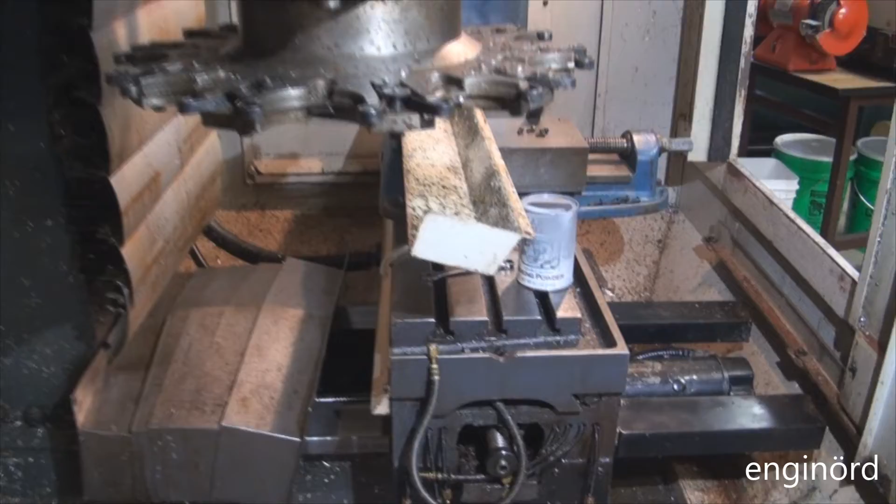Welcome back to the shrine and the dirtiest underbelly of my CNC. As you can see, some repairs are going on in this area. Some items are missing for the oil lubrication system.

For those who are not well versed in the realm of CNCs, most of them use flat beds, as you can see here. So this is basically the bed of the machine, and these are the rails, and this entire carriage that moves that y-axis back and forth slides on that ground and machine surface.

So there's the servo motor. The servo motor is driving a lead screw, and the lead screw is moving it back and forth. So this is the y-axis, and then this is the x-axis. You can see the x-axis motor only moves the table left and right, while the y-axis motor moves the x-axis, the saddle, and it's a lot more weight that the y-axis is moving.

So while I was doing some machining on the rapid moves, I got the Y lag over max error message, which means that the CNC wants to move this table in a rapid fashion, with a high speed for some travel, and it's commanding a certain amount of travel, but the feedback mechanism on the motor is not giving the proper feedback. So that means something is sticking, something is lagging behind.

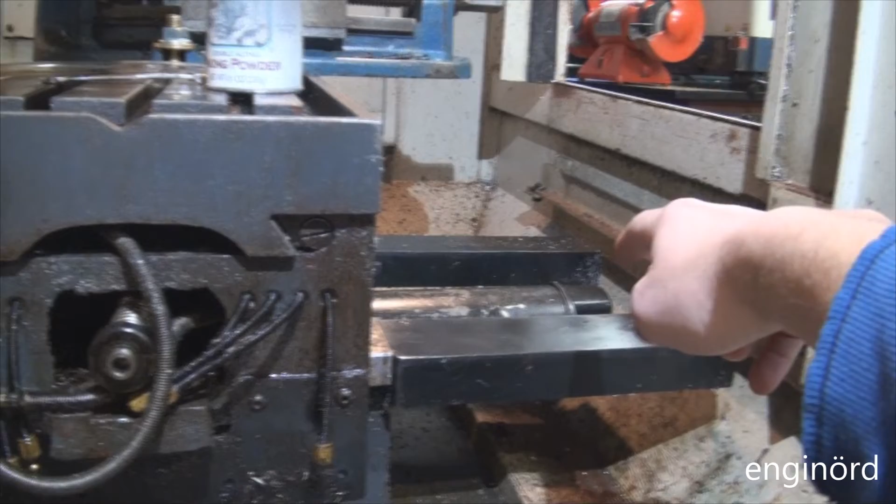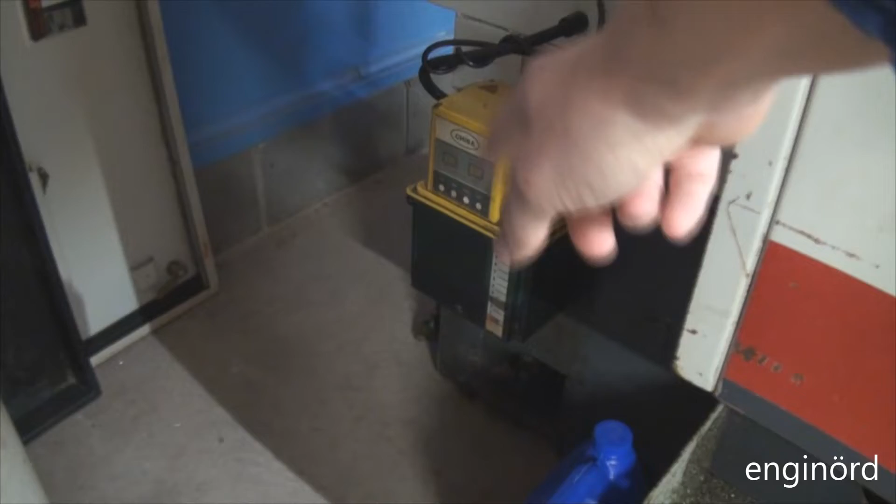So I took apart this motor to make sure everything is connected. That was the first thing I thought, and I checked if the encoder is properly secured, and that the coupling between the motor and the lead screw is properly tightened. And while I was doing so, I came around the machine, and there's the oiler, and the oiler was flashing an error 1 message. That basically told me that there's something wrong with the oiling system.

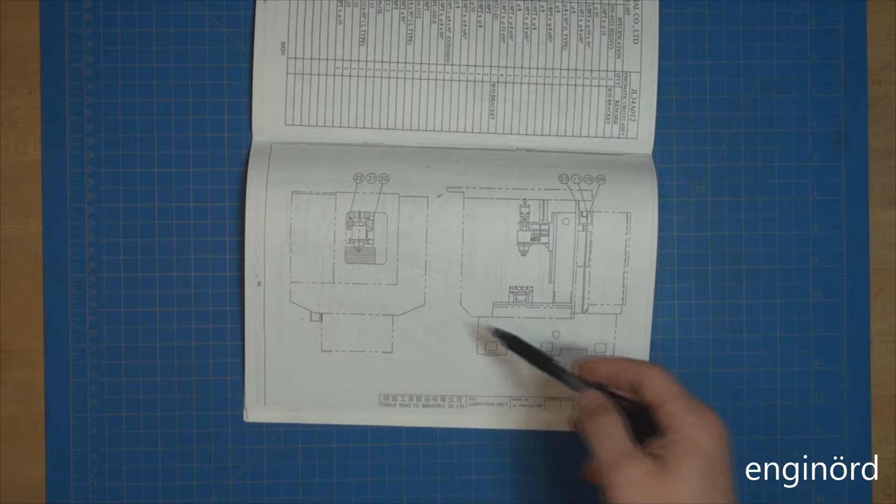So here's a picture from the instruction manual. This oiling system that's being used on the CNCs is called a centralized lubrication system. On some of the literature and online, it's being called single line resistance system, or SLR. What it refers to is there's a pump somewhere on the machine that feeds the oil into a central line, and then from that central line it's being distributed to all the places where lubrication is necessary.

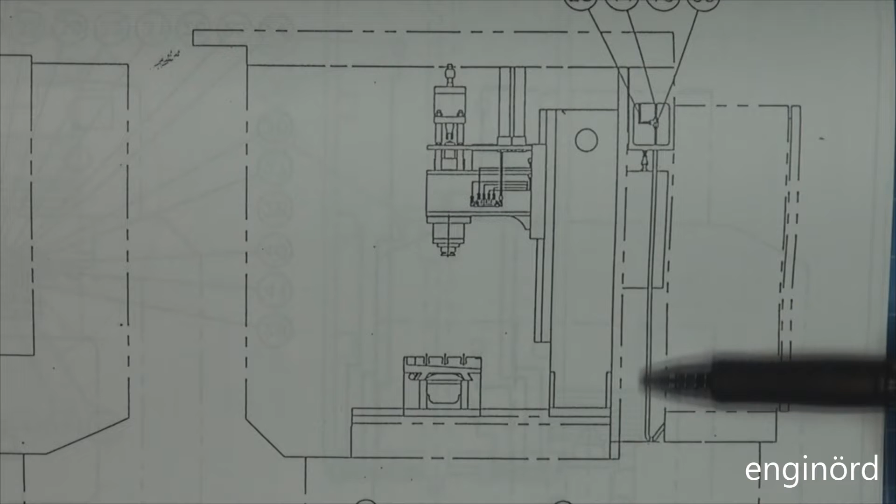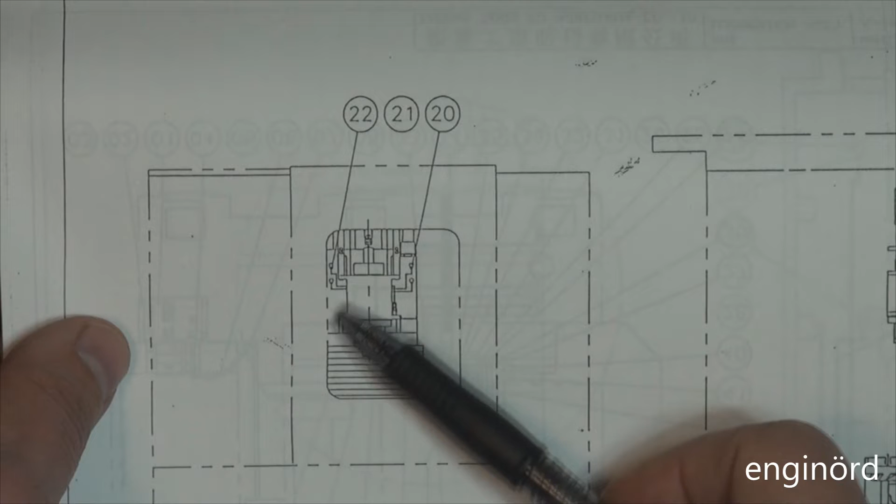So I'm gonna bring it closer, and what you can see here on the back of the machine, there's a line that's coming in from the pump, and then it splits into two. One side of the line will go to the Z gantry, and it's going to create lubrication here on the Z side. This picture shows where the lubrication is actually happening. You can see there are 4 ports that are lubricating the ways on the Z stage, and there's an additional one that lubricates the lead screw for the Z.

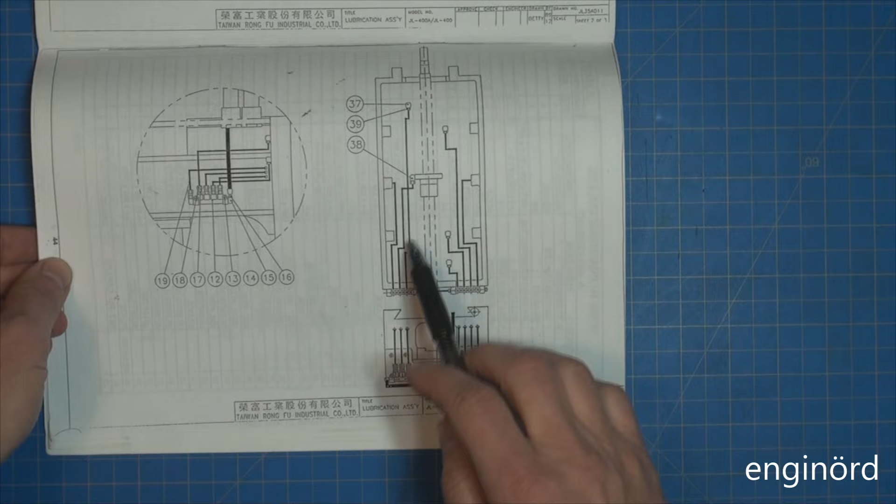So this one shows the lubrication for the saddle. Basically what we have here, one line is coming in, and it goes to a distribution box, and from the distribution box we have 3 going out, and then there's a connector here, and there's 4 going out here. So these are lubricating the Y or the saddle ways, and they are also lubricating the table ways. You can see there's also one line here that goes to the lead screw, so it's lubricating the lead screw.

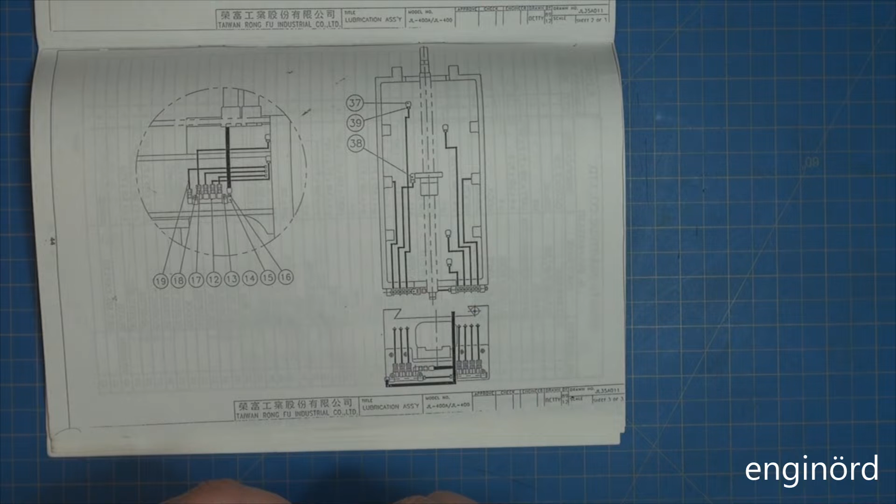I think these have never been serviced on the machine. If you go online and look at some of the instructions, they say that checking this system for a CNC, if it's running 24/7 all year, has to be basically an annual service where the lines are cleaned and some of these items inside are replaced.

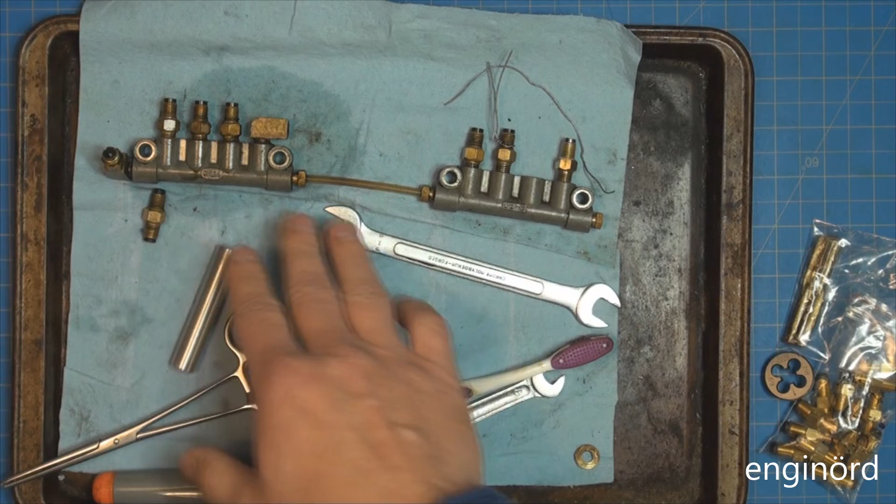So this is the distribution system that I removed from the y-axis, and right here you can see it's the same layout. Okay, let me try to frame it so you can see.

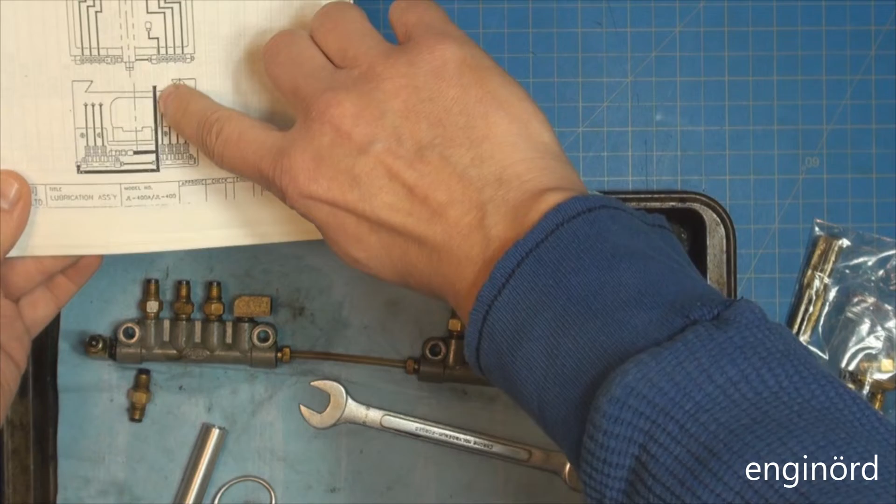So this is the bottom part that's missing on the machine that I showed initially. You can see a thick pipe is coming in here and feeding this port here, and that is distributing the flow. So these are the different outlets. Each outlet goes to a different place on the machine.

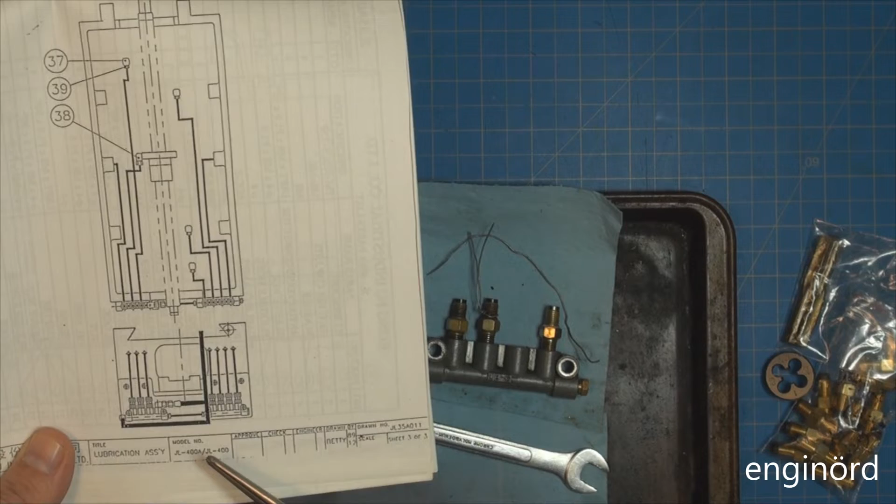So there are a total of 13 locations. There are 8 here that are being lubricated, and there are 5 on the Z, which you can see here. So this is the Z stage, that's the vertical axis, or basically the spindle.

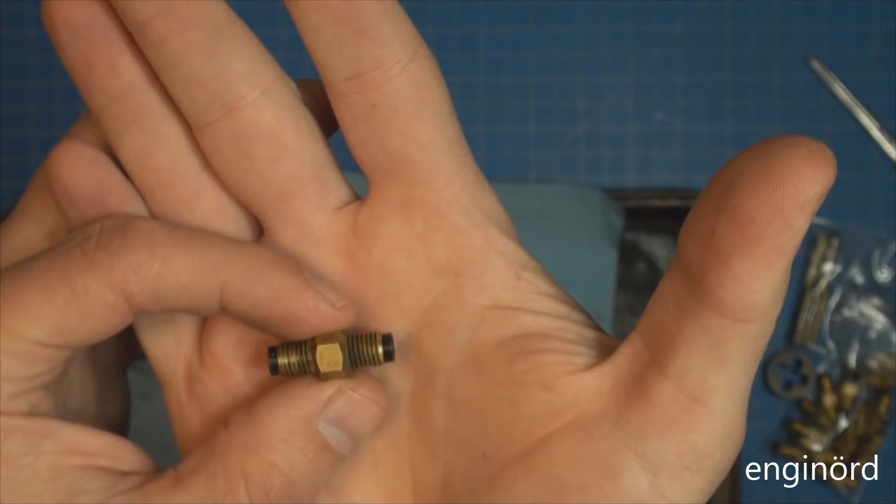So when the oil comes in through this inlet, it's going to go everywhere inside here and get pressurized. On the outlets we have these metering units. If you look it up, there's like 10 different names for these little restrictors - Lube metering units, metering orifice, oil fitting flow restrictor, or resistant unit device. So many names, but the point is this is basically a restrictor, a fluid dynamics resistance. On one side you have high pressure, it creates resistance, and on the other side you have low pressure. It resists the flow, just like a resistor resists the amount of something that wants to go through - for electrical it's current, for fluid dynamics it's volume flow rate.

So why do they do that? Basically, if you would just have a distribution box and pressurize one end, the fluid would go in the path of least resistance. Whatever the shortest route for the fluid to go, that's where all the oil would be coming out. That's not acceptable, because certain areas on the machine would have a flood of lubrication, and other areas wouldn't get enough. That's why they use this centralized system.

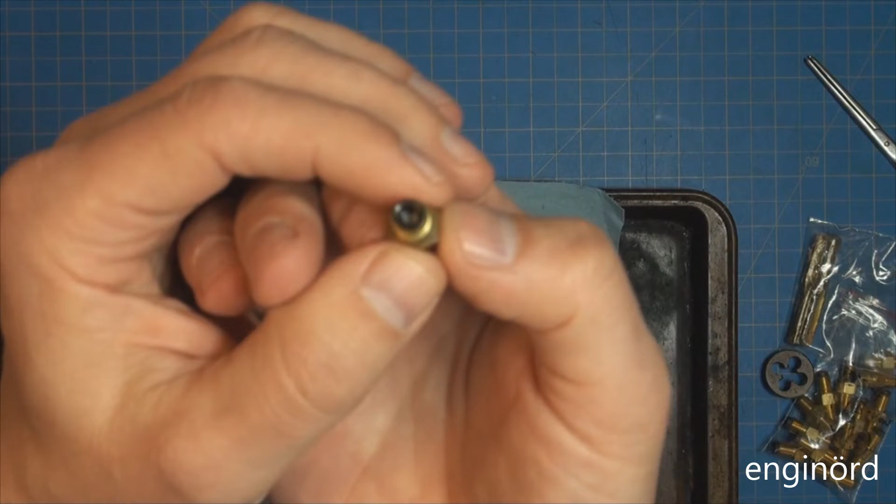In this restrictor you can see inside there are some little holes. What they typically have is some kind of flow restriction, which can be a stamped steel plate that acts as a restrictor. It can also be a threaded screw stuck inside there, but they also have a one-way valve or check valve, and most of them have some numbers stamped on them and an arrow showing the direction of flow. You can see on this side there are these little holes, and on this side the same thing. It's hard to tell which one is the business end, and even if you blow into it, it's not going to be easy because you have a resistance against the flow.

So these come in 2 different flavors. There's an M8 by 1 millimeter thread, either on one side or both sides, or you can have a 1/8 pipe thread. When you're selecting these, you've got to make sure you know which one you have.

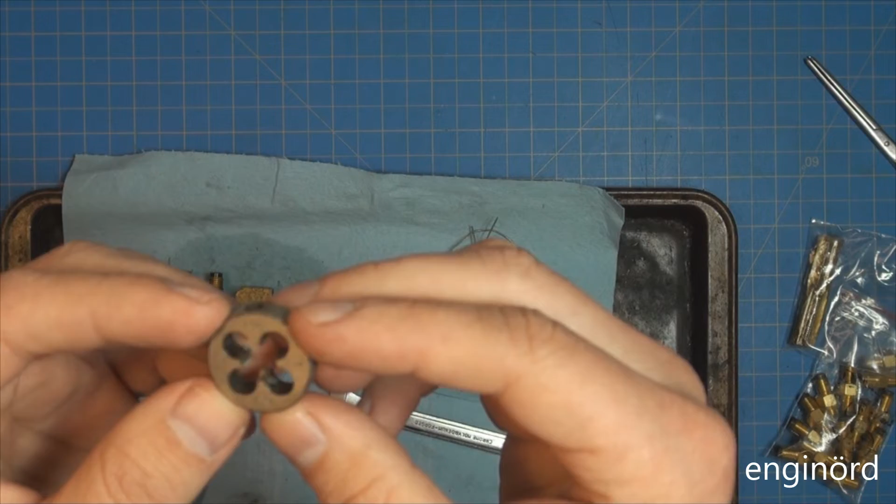So what I did is I went ahead and found one of these dies. This is an M8 - you can see it's an M8 by 1mm die, and it goes on both sides. I wanted to make sure I have a die and a set of taps, because I'll have to make some kind of hardware to attach it to my compressor and basically blow out all the lines to make sure they're clean. You can see it goes on both sides, and then I'm going to go ahead and replace all the restrictors.

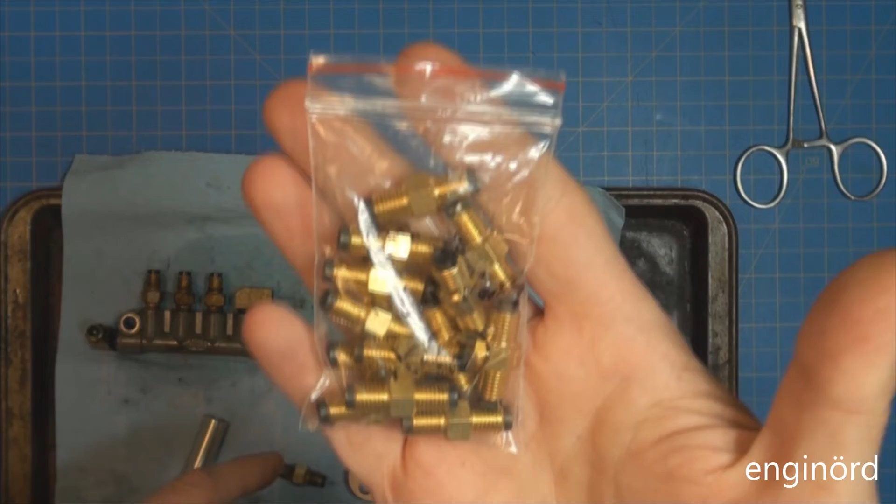These are available online - I ordered them on eBay from California. There's 13 pieces, sold as a set of 6, so I bought 2 sets of 6 and 1 or 2 extras. What you can see here, if I can frame it, it says HSS4 - that's the designation. The HSS basically says it's 2 M8 by 1 threads on both sides, and the 4 tells you how much fluid it will be able to pass through.

Here on this one you can see the arrow, which shows the flow direction - the flow is going from this side to that side. So if you install this on the distributor, it would sit like that. The flow is going from here and it's being routed out to the individual places on the machine. If these get plugged up because the oil is dirty, or because the plastic is degrading and small chunks of plastic in these lines get torn off and travel with the fluid, sooner or later they will plug up these little orifices.

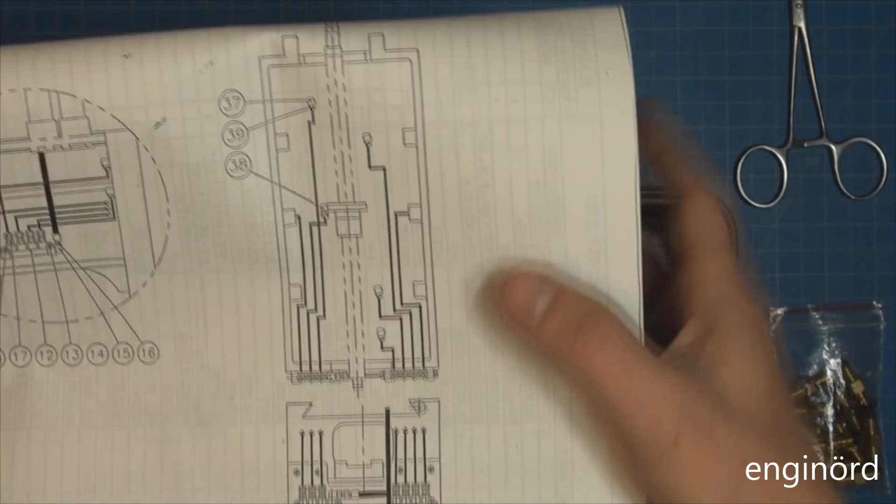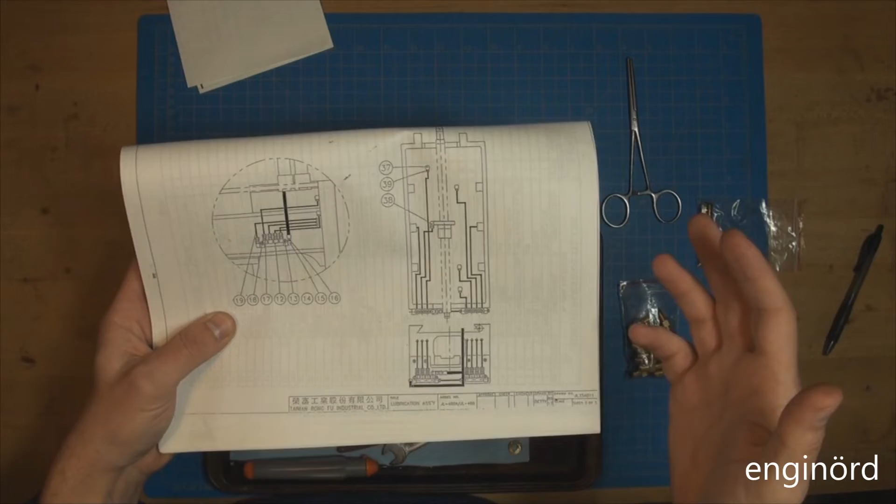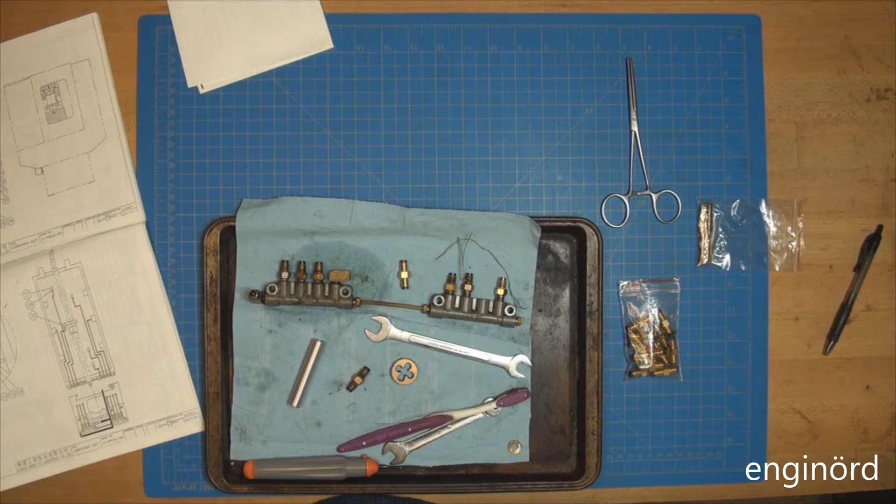Despite having high pressure on one side, you're not going to have much oil flow on the other side. So you will start starving that side of the machine, and oil is not going to get to these places. Essentially, the machine will run fine on slow moves, but on the rapids, it will not be able to move fast enough. The servo motor won't have enough power to move the table at a given speed. In my case, the Y stage, which carries the weight of the table and saddle, is a considerable amount of mass that the servo motor has to move. If there's not good oiling, not an oil film underneath, it will have a hard time moving it. It will move it, but you'll get an error on the machine side.

A couple more things about the oiling system. On CNCs, almost exclusively, the oiling system is a total loss. Whatever oil we pump through these restrictors into the machine goes down to the belly of the machine and flows into the coolant tank. In the coolant tank, because the oil is lighter than the coolant, it floats to the top, creating an oil film that prevents oxygen from entering the coolant, which is typically water-based. This helps anaerobic bacteria grow, and once that happens, your CNC will start to stink. There are different ways to skim off the oil or clean the tank, I don't want to talk about that right now, but that's one of the reasons this oil we use to lubricate the ways causes the CNC to get that special CNC smell.

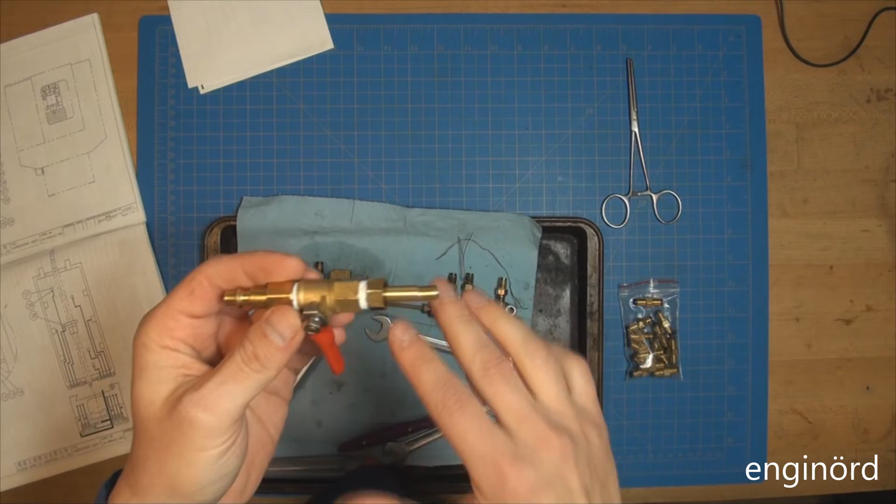Made a device, it only took me an hour. I'm going to save you from the machining footage. This was actually an old plug-in pop connector that I salvaged, I never throw any of these things away, so I just drilled it out. Then I made a piece of brass pipe with the same thread, M8 by 1, so it matches. I wanted to braze it in, but it was short, so I made a longer one, brazed it in, and added tape here.

Now what I can do is, for each of these pipes that go out into the machine, I can drive this in, hook up compressed air on that side, and clean those out, then listen in to see if it's clean and there's no obstruction in those pipes. That tool is going to be used once, I don't see any future use for this one, but I'm off today.

It's Friday, and I'm like, why not?

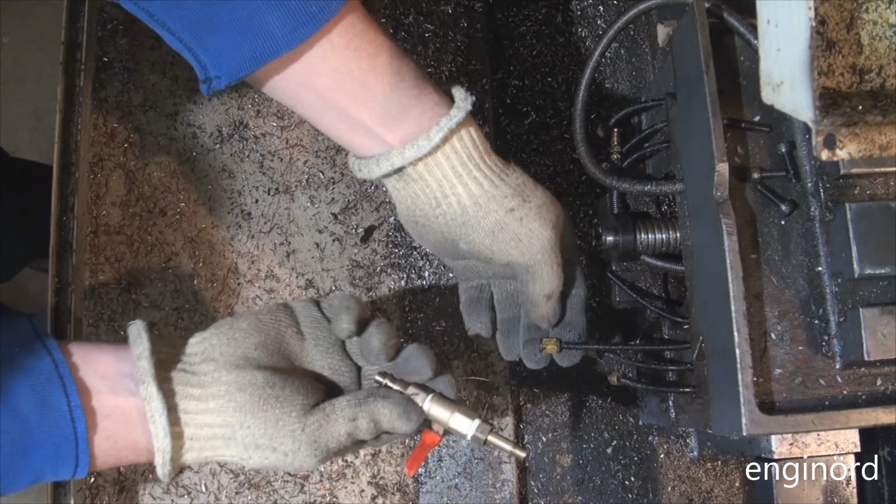Here's the line, I'm going to hook this up to the line. There's a compression fitting with the pipe. I'm just going to hand tighten it, hook up the compressed air, and then open it. You can hear air passing out through the saddle, so that one is clean. Initially when I open the valve, what you hear is the oil gurgling out, it's basically purging the oil, purging the air, and getting rid of whatever else is there.

So let's try this one. Right there you can hear the oil gurgling and it's cleaning out the lines. I'm going to do the rest of them off camera.

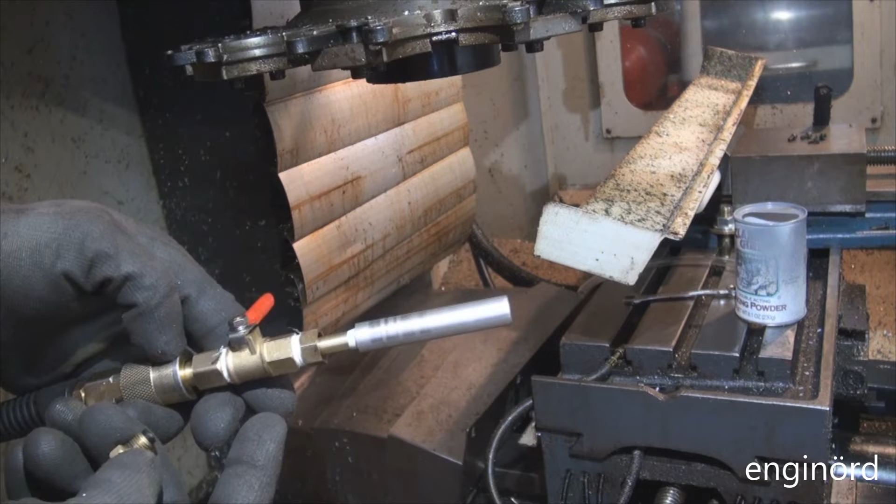Here's a test, I machined a new piece here. I just cut M8 by 1 threads on both sides so I can couple it with my previous part. Here is the restrictor, so we're going to put the restrictor in. Just hand tighten, and you can see once I open the valve, there's not really much flow. You can hear the air whistling out, probably because I cracked this here, and also there's a leak at the quick connect.

But now watch, if I take this out and turn it around, all I did is flip it 180. When I open it... this just drives me crazy, these are the worst couplers I ever had. Okay, so here.

You can hear that air is coming out and whistling. So indeed this part has a one-way valve. It's preventing the flow backwards, so oil cannot flow backwards, it can only flow one way.

I'm doing another test. What I did is I hooked up the air inlet to the distributor, and you can see I have all the restrictors in. Once I open the valve, air is coming out from all of them. That one, you can see the paper is bowing. So here are these, these are the old ones.

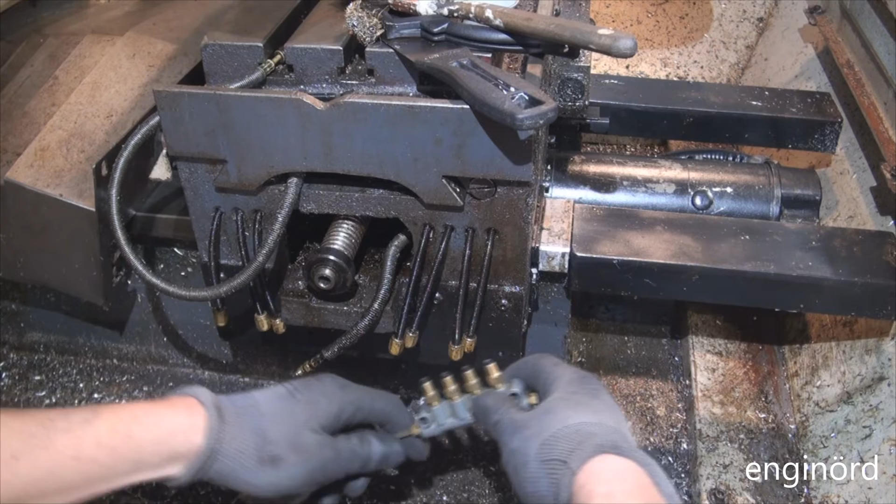Here's the distributor, it's going back to its place. I replaced all the nozzles or restrictors or whatever else you want to call it, and I blow it out with a gun, so hopefully this part is completed for right now.

Just want to make sure that there are no foreign objects here when I connect back the pipes. That would be bad. So when tightening these, I have to be real gentle, because it's easy to break the casting or something else here, but care must be taken that there's no leaks. So again, just look inside, see if there's no foreign object, and this can be connected back.

This is the last line I need to connect, and you can see these are going to the ways most likely, and then this one is probably going to the lead screw, so that goes in here. And now everything is connected back.

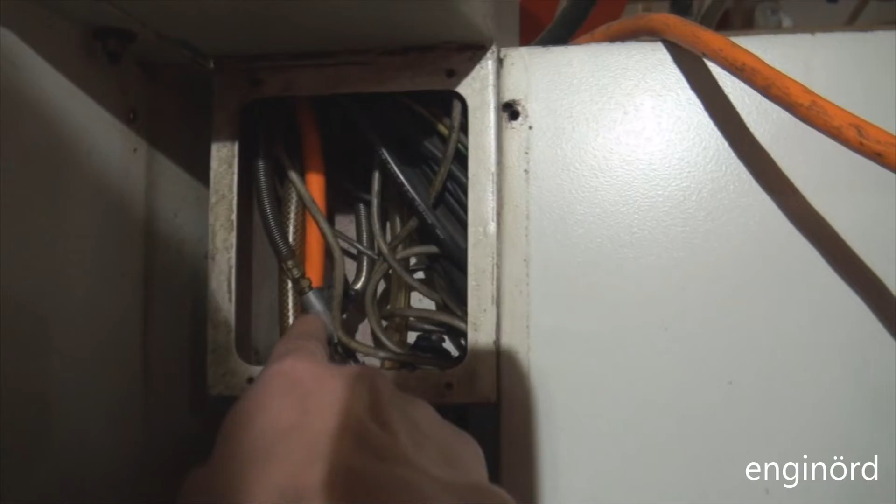But this is the right side of the machine. You can see the hose here that comes up, that's the hose that comes from the other side. There's the pump, and then the hose comes up here, right there, and then it goes into this T, and then it branches out. One goes into one of these flexible cable housings, and the other one goes into the other one. So you can see there are two here.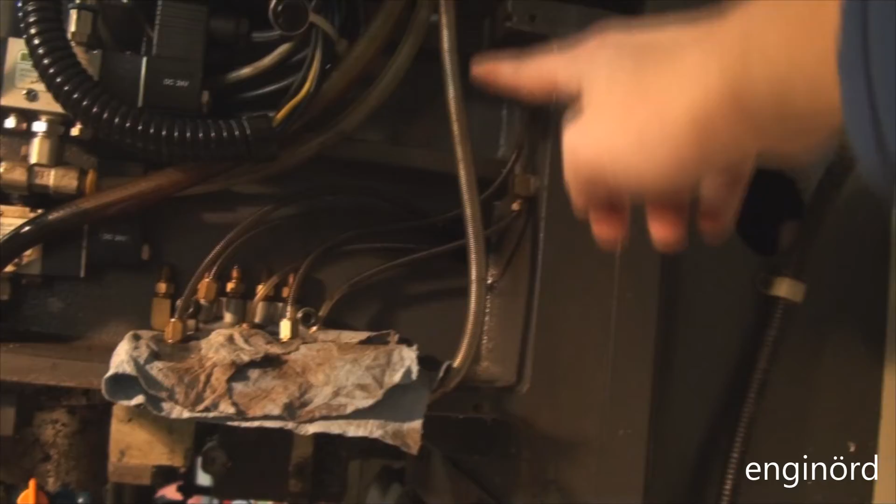So this is the Z stage, and the Z stage has one of these hoses. You can see it goes into this flexible cable channel, comes down here, and then it ties in basically the same way as the other one, and it branches out into 5 places. You can see the connectors here. So there's 2 here that are lubricating this way, and there's 2 of these on the other side, and then this one most likely goes to the lead screw.

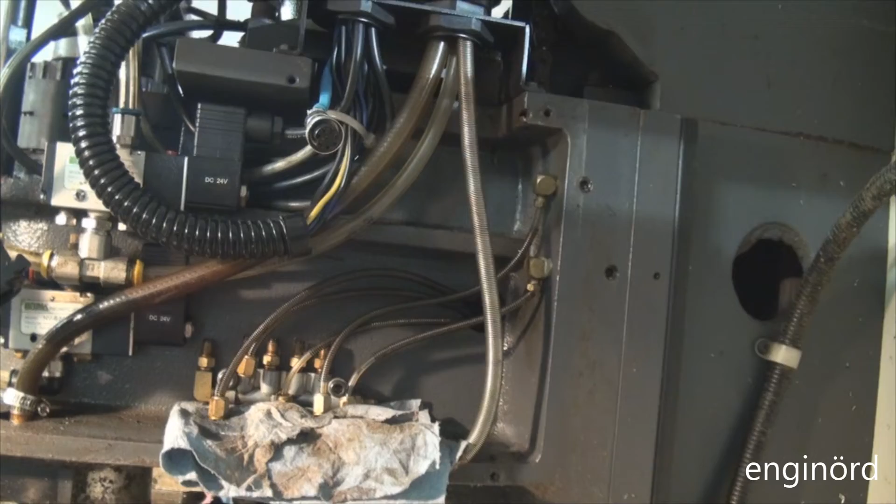So when the oil comes through this one, it's being routed there through these metering valves, and it will be distributed into the individual places. I'm going to take that off and disassemble it and replace those metering valves. The other hose comes down through this channel here and goes into the Y stage, goes under the table to the other side, which I already replaced.

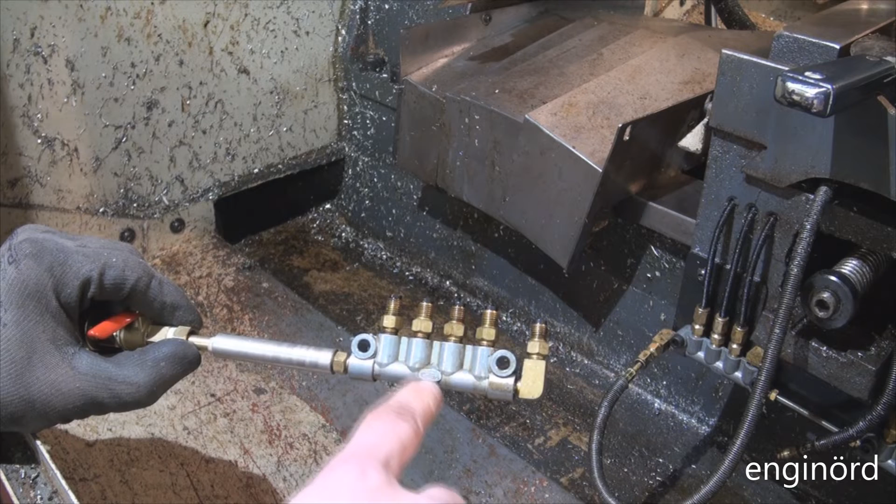So check this out, this is the Z stage, and these 4 basically go to the ways, and then this one goes to the lead screw. As you can see, the outlets, watch these outlets, these are the restrictors, so we have a restrictor at each outlet. But watch on the inlet, this looks to be a restrictor too. I didn't look yet, I'm going to look, but I didn't look yet.

So I'm going to go and open this, and this is just a piece of paper. You can see there is some flow coming out here, but not much. But watch this, see what I'm doing? I just put this piece of paper here, and you can see it's not really moving here, it's not really moving there.

And there's also a leak here. So watch that bubbling, see that bubbling? That means this is plugged up, and the air has an easier way to come out right there.

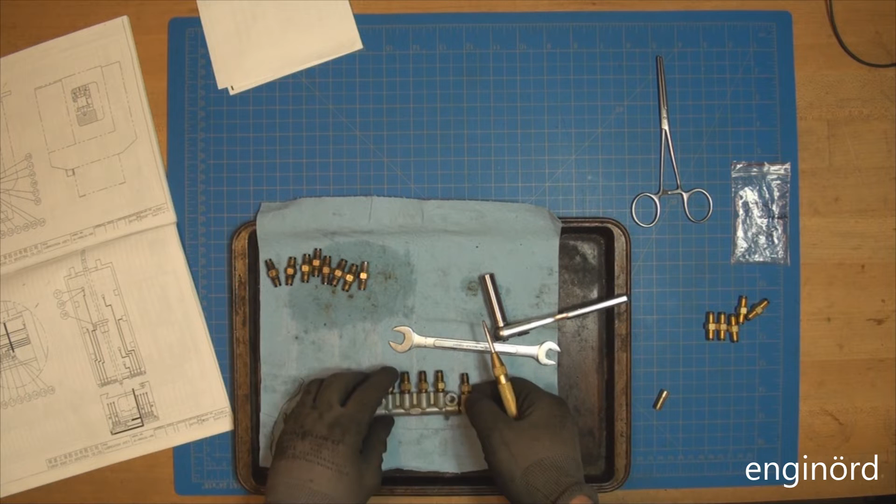So I don't think these were ever replaced. I'm just marking these for no particular reason, I did the same here. The arrows are gone, so I just take a center punch and mark them closer to the outlet side, for future reference.

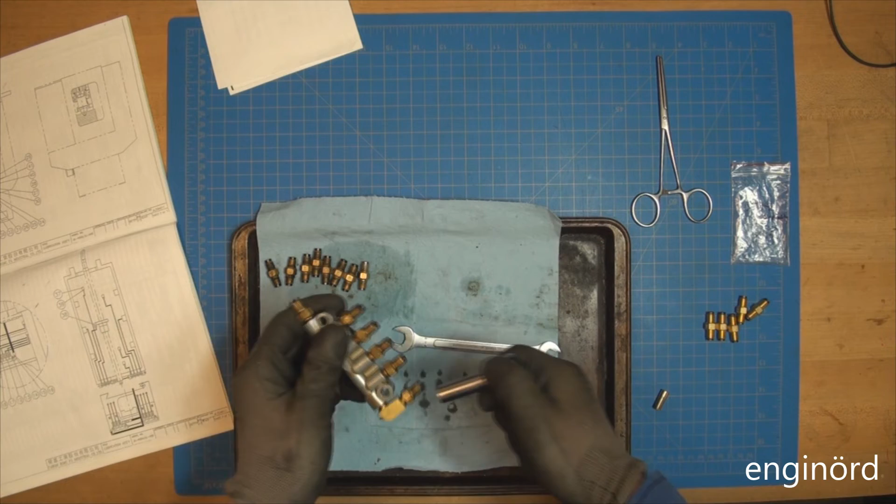Yeah, this one was loose.

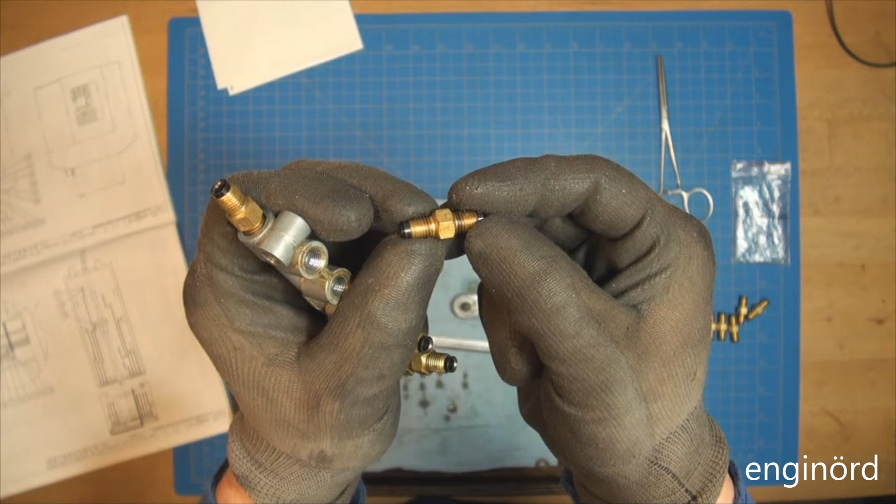So this one has a marking on it. You can see there's an arrow, but most of them are worn off. On the other side there used to be some marking. Okay, this says HSS and then 3, so that's HSS 3.

This just really shows how much oil we can push through. This one says 2. This one says 3. This one is 3. That is 3. And that is 3. So all the ones on the Z stage are 3, and this one is 2.

This one goes to the lead screw. The ones on the Y stage are not readable. This one actually says HSS 4. So this one is 4. That's on the Y stage.

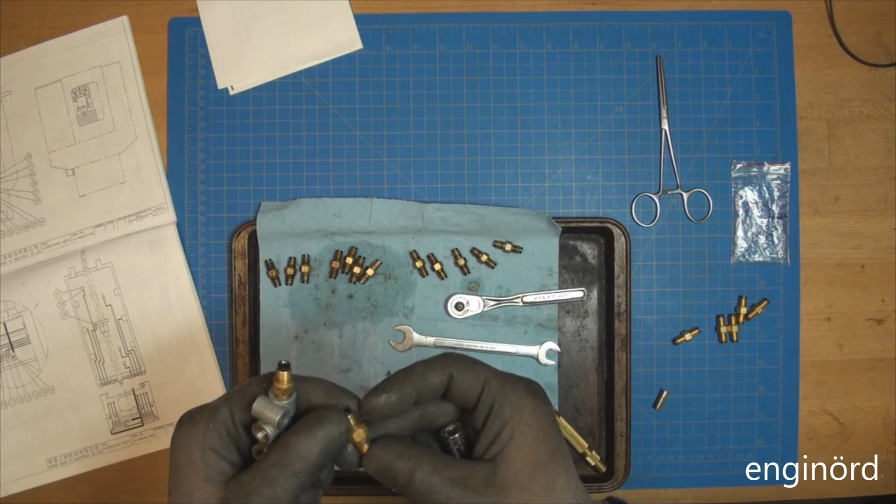Yeah, this one says HSS 4. So the ones on the Y stage are 4. The ones on the Z are 3 and 2.

You know what, I can come back in the future and replace these if I'm going to have any issues.

I took one of these old ones and basically just took it apart and removed the guts, completely removed the guts. If you're curious what's inside, here's another one I took apart, and this is the outlet side. I marked the outlet side. You can see the punch mark there. So that is the outlet.

And this is the inlet. It's just some kind of ferrule, just a ferrule that's press fit in there. Inside we have a through hole. You can see the through hole now.

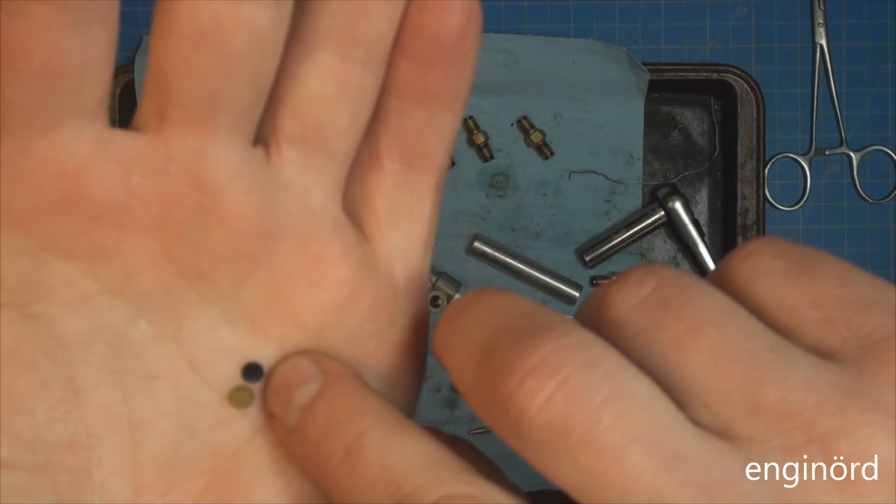And then this pin is sitting in that through hole. So basically this pin, when I drop it, you can barely see through the light there, and that's where the oil has to squeeze through. On the other side we have a little valve, which is basically just a metal or brass plate, and a rubber ring. That's basically the one-way valve.

And then we also have this screen. That's the screen you can see inside when you look into it. You can see that screen here on both sides.

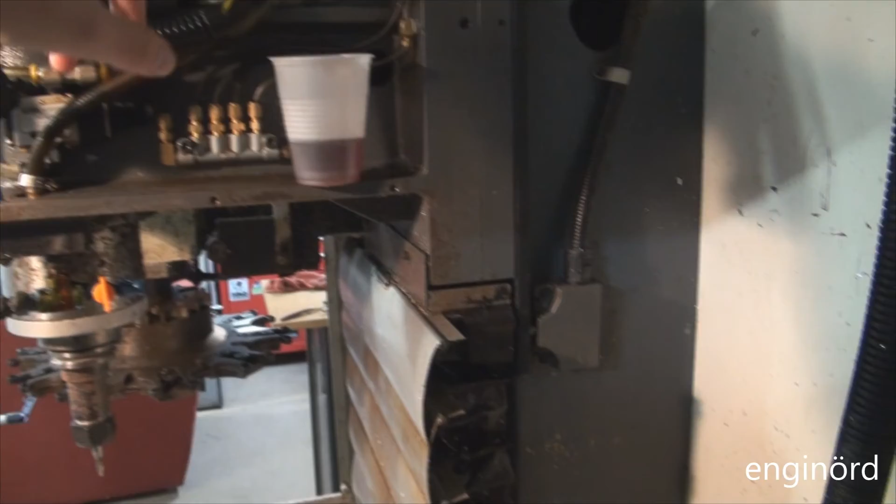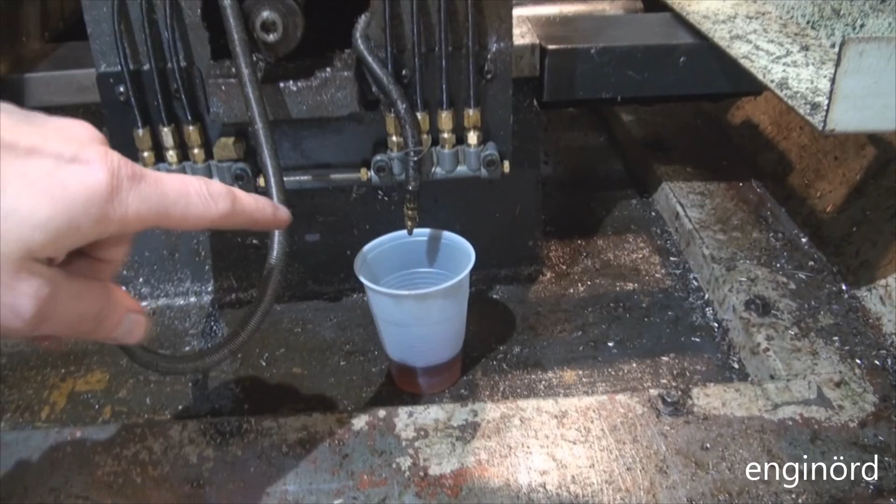The machine is running and I disconnected the inlet to the Z stage, and I put a cup underneath, so you can see the oil in the cup goes up to the first ridge here. This is like the zero ridge, that's the first ridge. On the other side I did essentially the same. You can see the input is disconnected. The oil is dripping down because it's the lowest point, and there's a vacuum on the other side. But you can see it's about the same amount of oil came out.

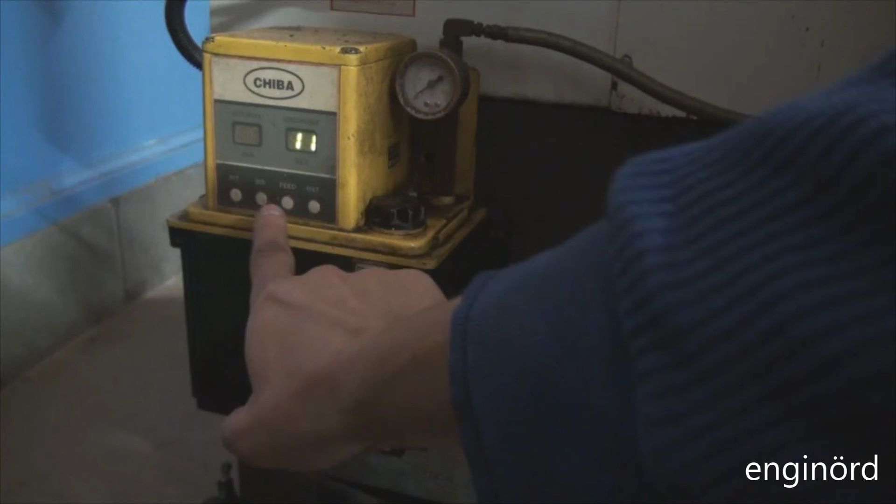Now watch this. This is the pump, and I can go and manually press the feed, and that's going to pump oil into the system. So basically it goes into this line, and then it's being distributed up in the machine.

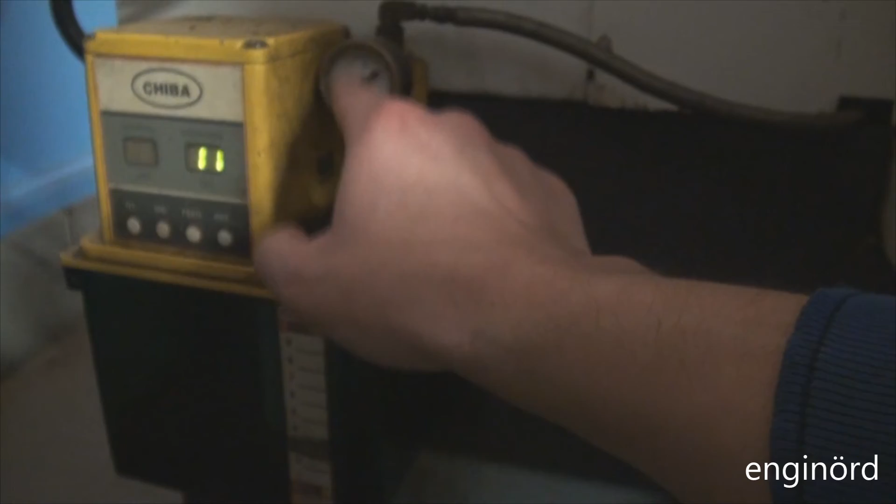Watch this meter here. If you have a CNC and you're pumping oil and the meter goes up and immediately comes down, then you have a leak somewhere. Just like right now, I have a leak. I just wanted to show you. Watch this, see I'm feeding, there's pressure in the system, and when I let it go, it instantly falls to zero.

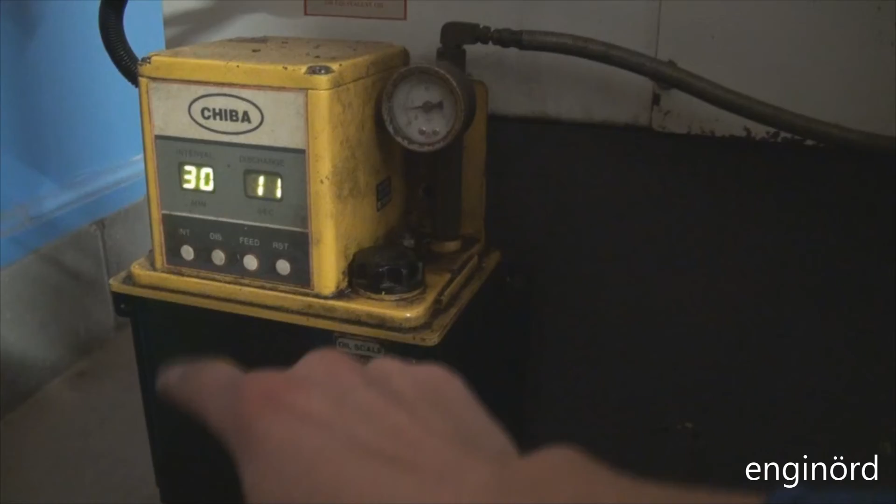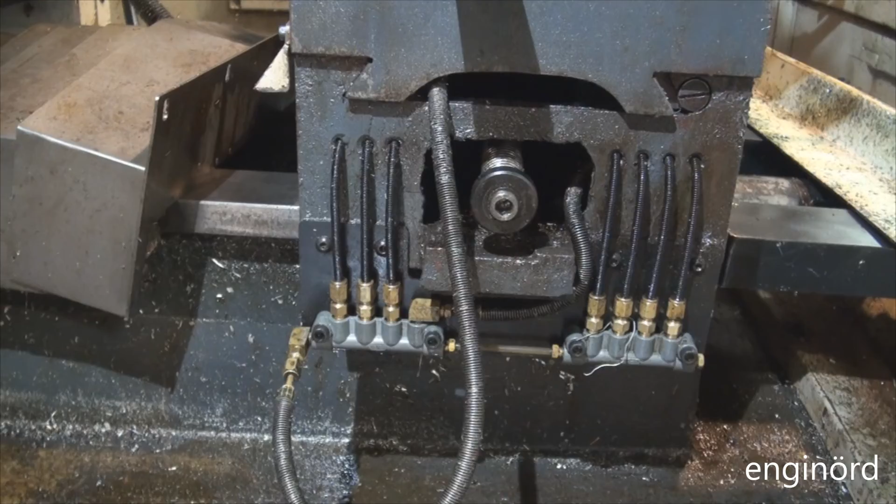I assembled back the feed lines for the X, Y, and Z, and what I did is I exercised the pump a couple times, filling up the system with oil. If you look here on the Z stage, you can see there's a dab of oil right there, it's coming down. So we got oil coming out on both sides. Now I cannot look at the Y or X because I have no idea where that oil would come out, but I'm hoping those areas also got some good oiling.

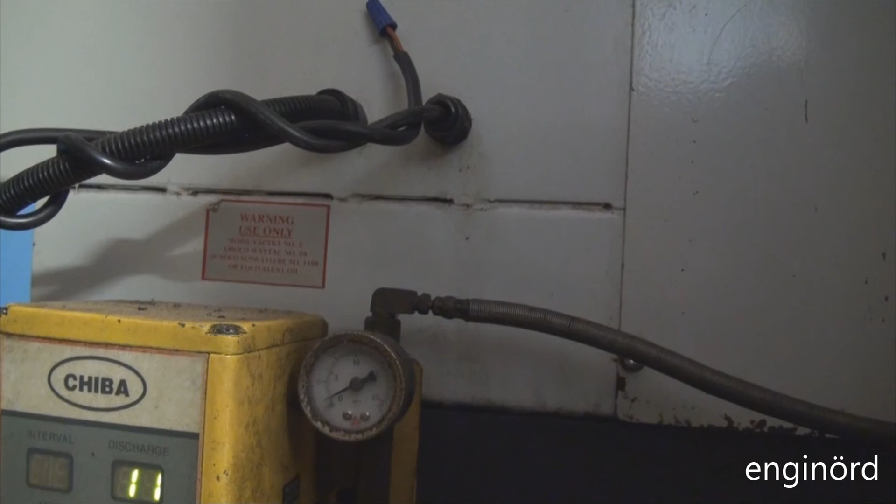I wanted to show you again, when the hoses are connected, watch the meter here. You can see when I turn on the feed, it goes up to 5 and comes back slowly. So that takes about 5 seconds for it to come back completely to 0.

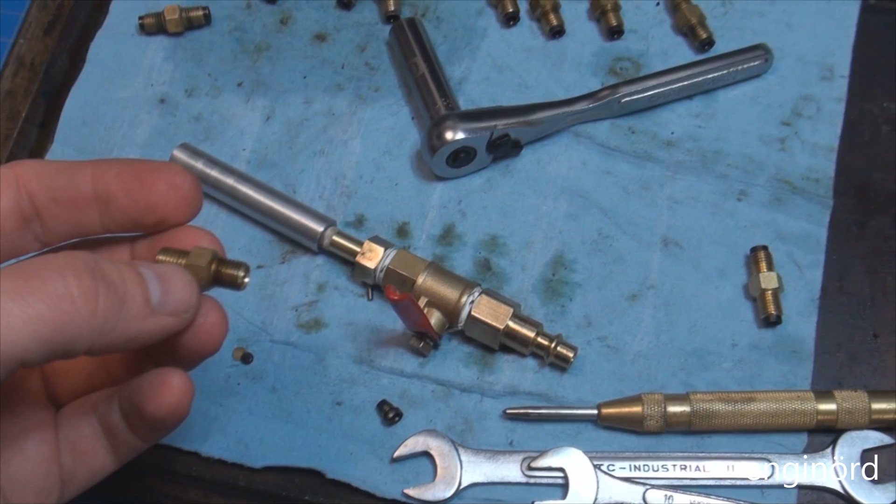One more thing, the gold standard for the way oil is this Mobil Vactra, and that's what I'm using, that's what everybody recommended. So hopefully that's another successful repair for my machine, and I hope you guys learned something and enjoyed the video.